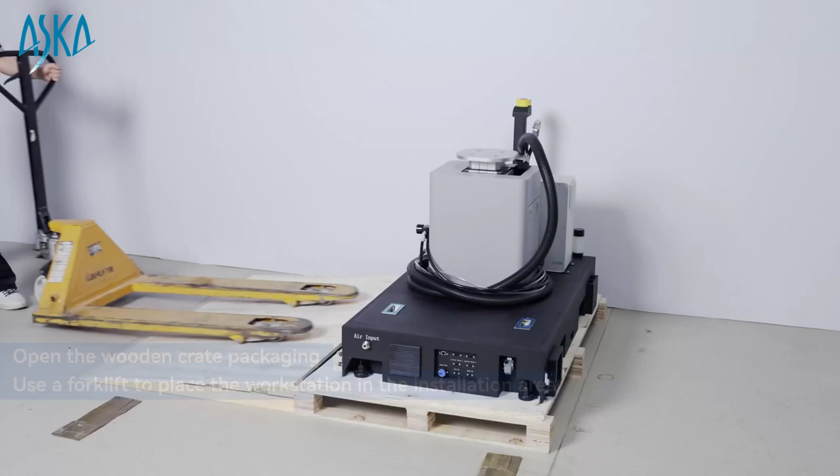Dobot palletizing solution. This video will introduce the installation tutorial for the palletizing solution. Open the wooden crate packaging. Use a forklift to position the workstation in the installation area. Note the distance between the front wheels of the forklift. Organize the items inside the package. Check all items.

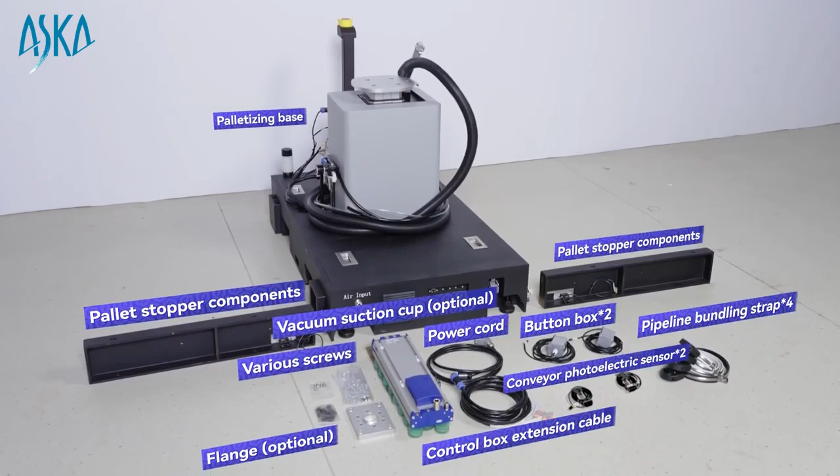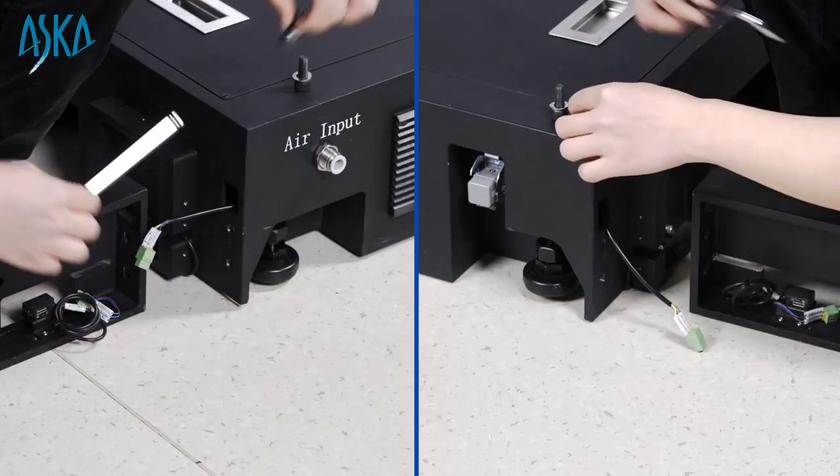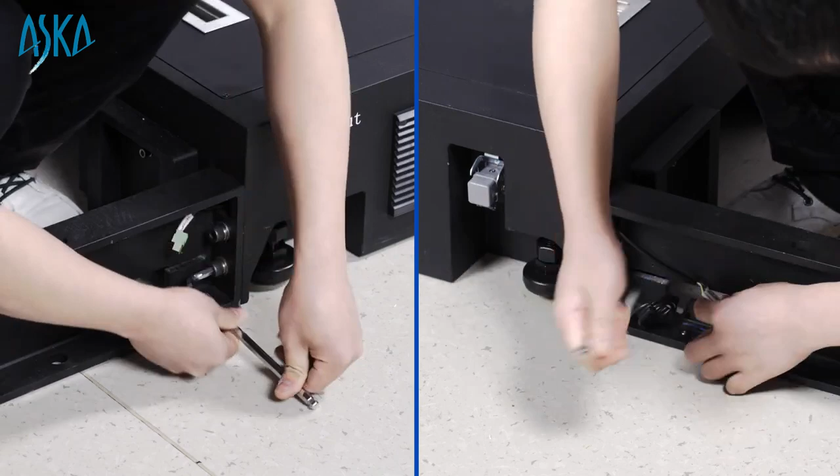Install the left and right pallet stoppers on both sides of the palletizing base. Pay attention to the orientation of the grooves during installation. Thread the sensor connector through the wire hole. Tighten the screws of the pallet stoppers. Plug in the sensor connector. Then organize the wiring harness.

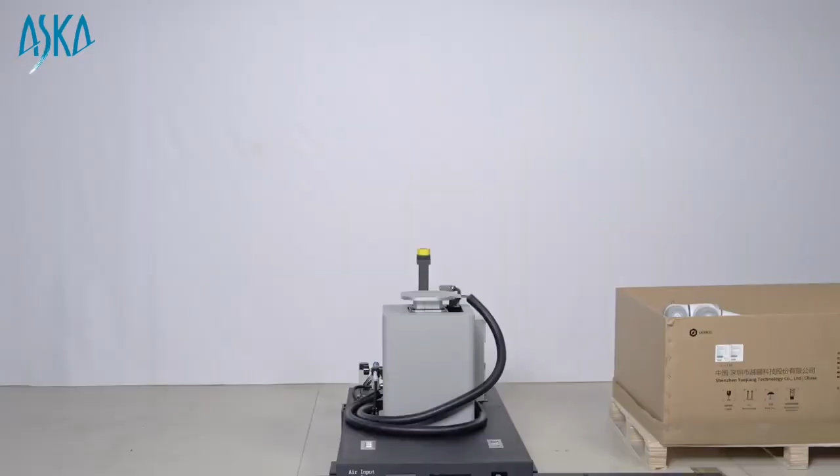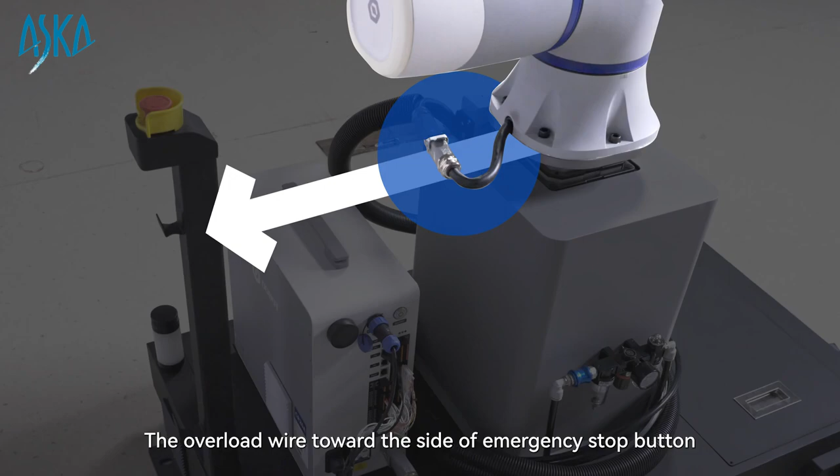Use a wrench to adjust the foot cup of the workstation at the four corners. Level the workstation. After the base installation of the workstation is completed, install the CR20A cobot onto the mounting base of the palletizer. Ensure correct installation orientation, with the overload wire toward the side of the emergency stop button. Secure the robot to the base using the 6 supplied M10x25 screws. Simply plug the robot's overload wires into each other.

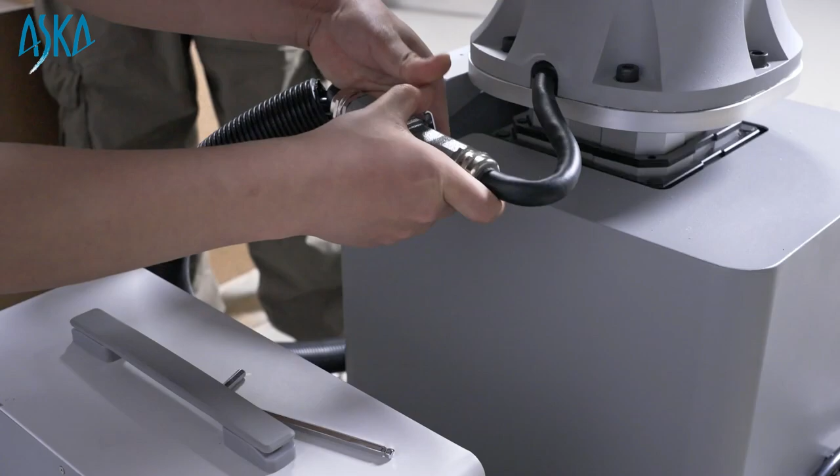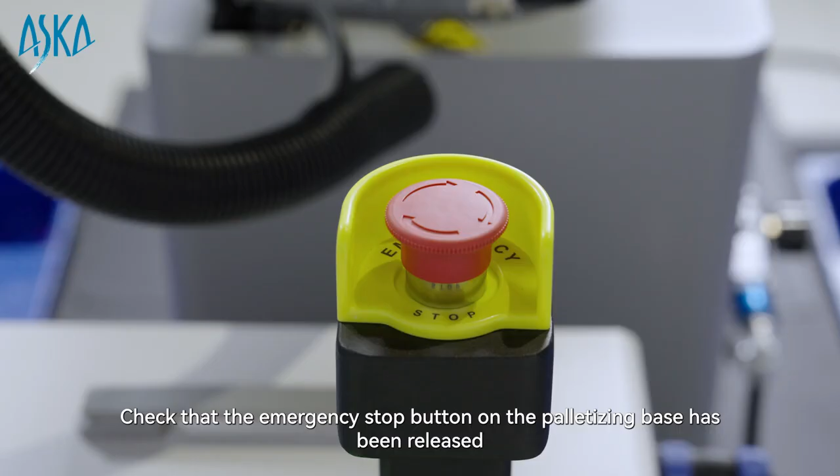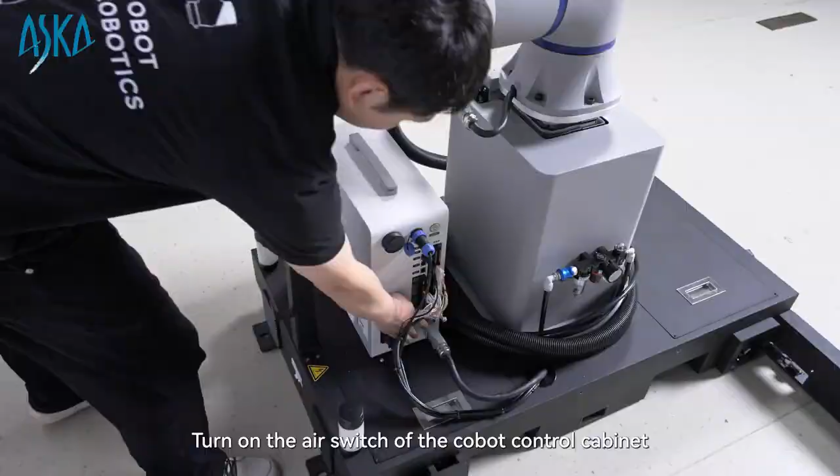Connect the pallet confirmation button box to the left and right ACK interfaces on the base respectively. Connect the conveyor photoelectric sensor. Check that the emergency stop button on the palletizing base has been released. Connect the power cord of the workstation. Turn on the workstation leakage protection. Turn on the air switch of the cobot control cabinet. Then press the power button. Wait for the indicator light to stay on steadily to complete the startup.

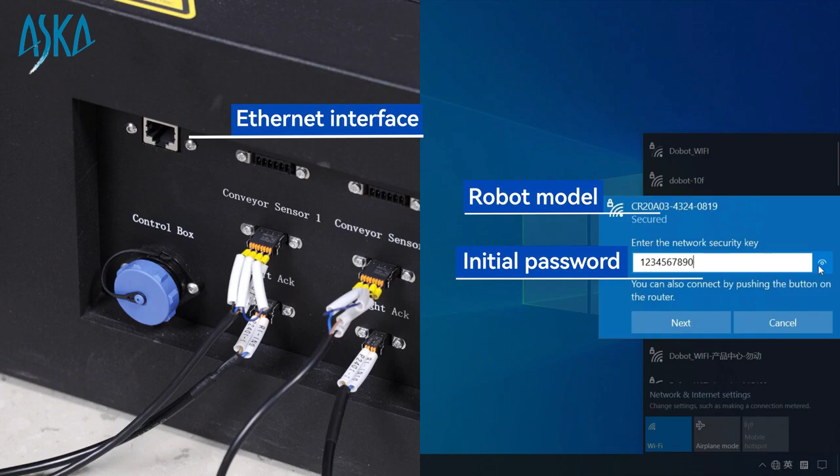Visit the Dobot official website using a tablet or computer. Download the Dobot Studio Pro software. After downloading, proceed with the installation. After the software is installed, connect the cobot to your device via Wi-Fi or Ethernet cable. Open Dobot Studio Pro, select the cobot you want to connect to. Check the software and controller versions. They should be maintained at 4.5.1.0 PAL or above.

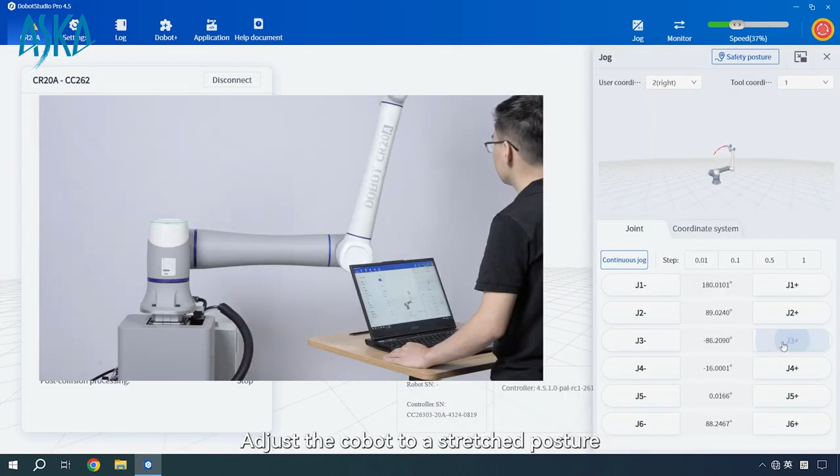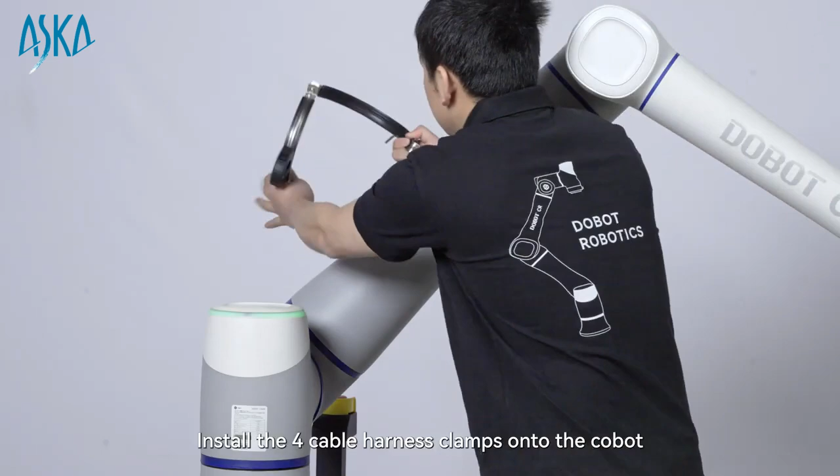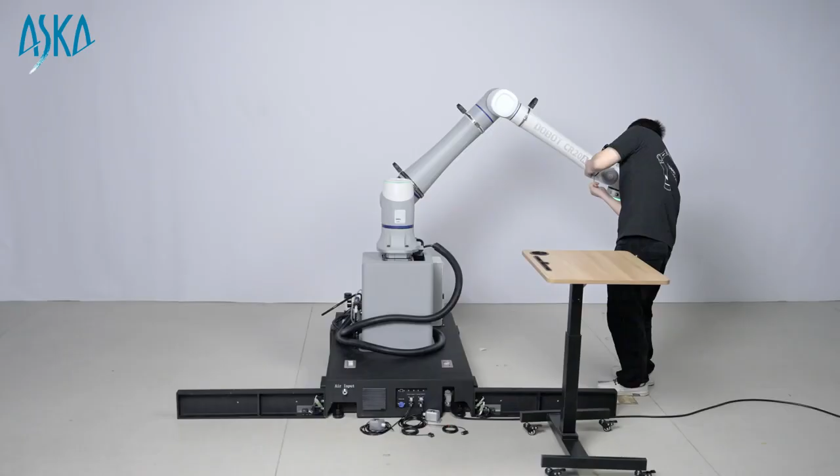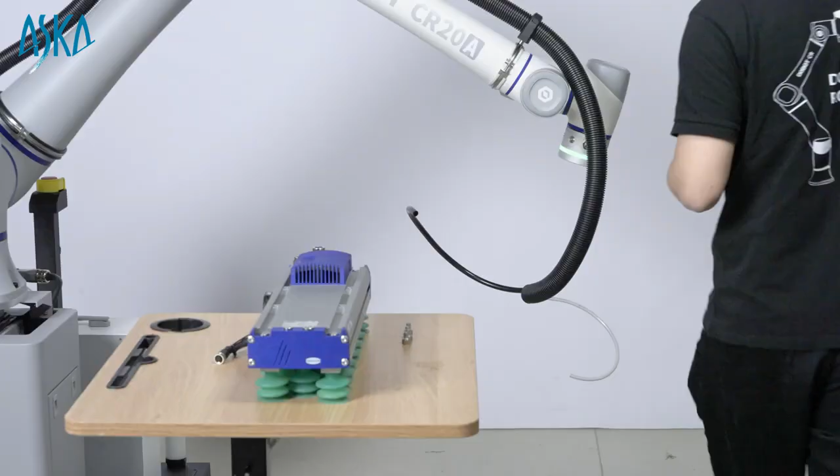Set the enable button to on. Click the jog button in the top right corner to open the menu. Adjust the cobot to a stretch posture to facilitate the subsequent installation of the cable harness and suction cup of the end effector. Install the 4 cable harness clamps onto the cobot. Organize the cables and fasten them through the bracket. Fix the flange to the end effector of the cobot with 6 M12 screws. Install the suction cup of the end effector using 4 M12 screws.

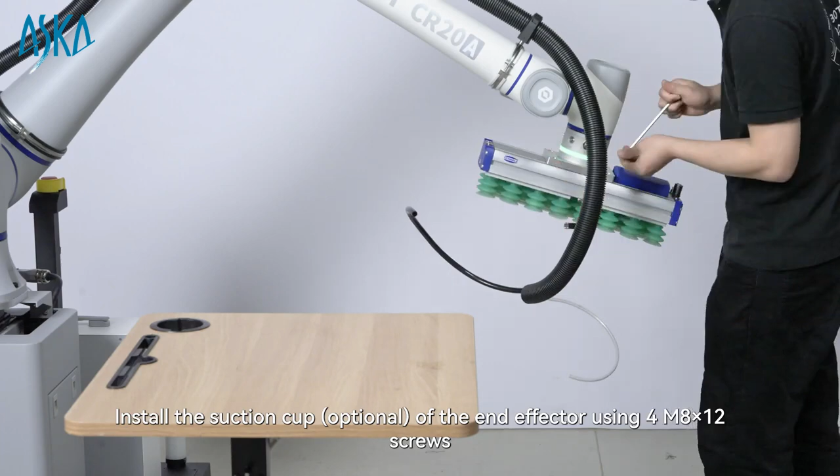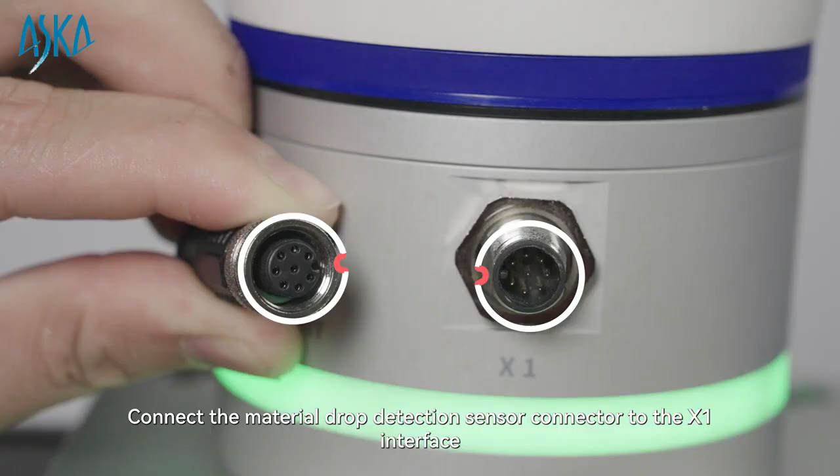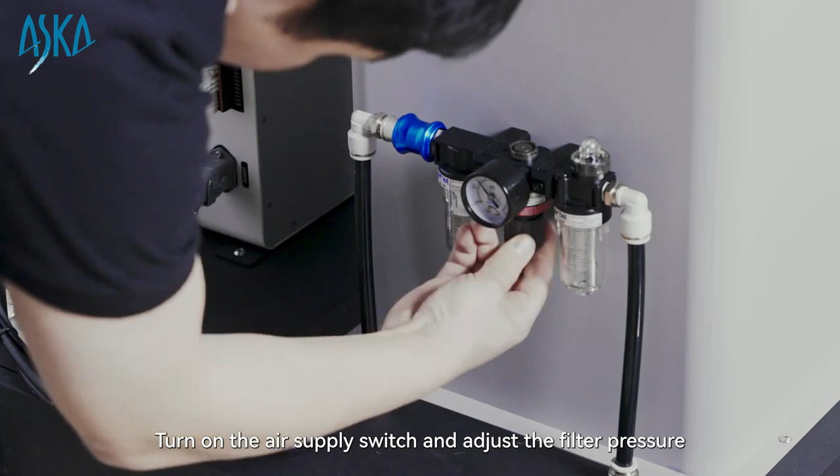Adjust the lengths of the cables according to actual usage. Insert the 12 mm air intake tube and the 8 mm vacuum breaking tube. Connect the material drop detection sensor connector to the X1 interface. Use a 12 mm tube to connect the air source to the workstation air inlet. Turn on the air supply switch and adjust the filter pressure. Recommended pressure is 0.6 to 0.7 MPa. After the palletizing hardware is installed and turned on, we can start working on the software.

Open Dobot Studio Pro. Click Dobot+. Import the palletizing plugin provided by the distributor. Click on Plugin Installation to enter the authorization pop-up window. After copying the device serial number, visit the designated website for authorization. Enter the device serial number and the activation serial number provided by the distributor on the web page. Click to obtain the registration code. Copy the registration code or save it as a file.

Then reopen Dobot Studio Pro. Paste the registration code or import the file in the plugin authorization window. Click Authorize. Wait for a moment. Authorization and plugin installation will be done automatically. After completing the authorization, you can start using the palletizing function to generate the running program.

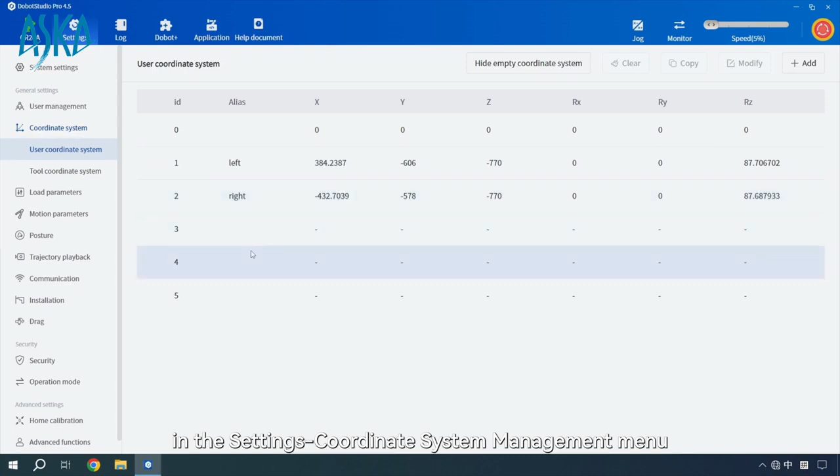Check whether the coordinate system used by the pallet has been built in the Settings Coordinate System Management menu. Click on Tool Coordinate System. Fill in the tool coordinate system values according to the actual coordinates of the tool. Click Save to complete the tool coordinate system setup. Click Monitor in the upper right corner of the interface. Check whether the default IO matches the actual setup.

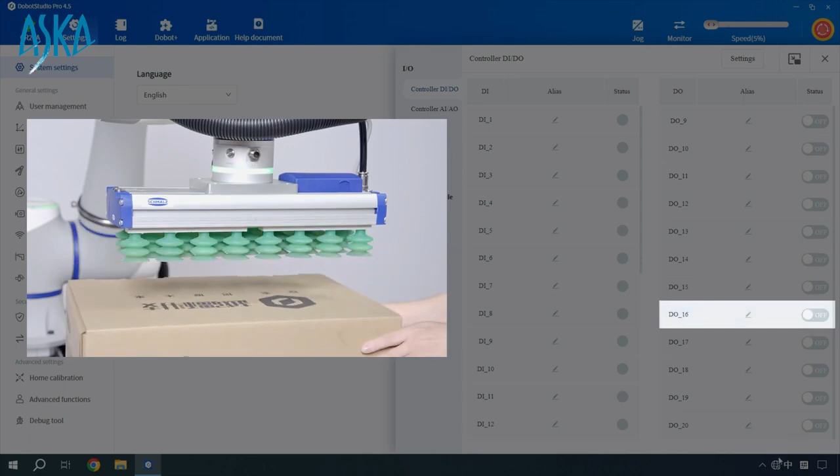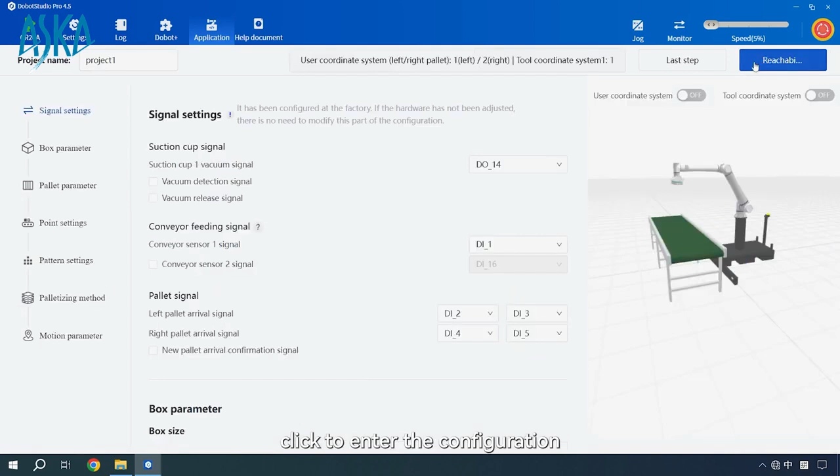Next, create a new palletizing project. Go to the Application menu, click Palletizing. Click New Project in the upper right corner to create it directly, or click to create a new project in More Projects. After configuring the basic parameters of the project according to the actual application scenario, click to enter the configuration. Configure the suction cup I/O signal. Configure the signal for the conveyor belt to feed material. Configure the signal for confirming the new pallet's position.

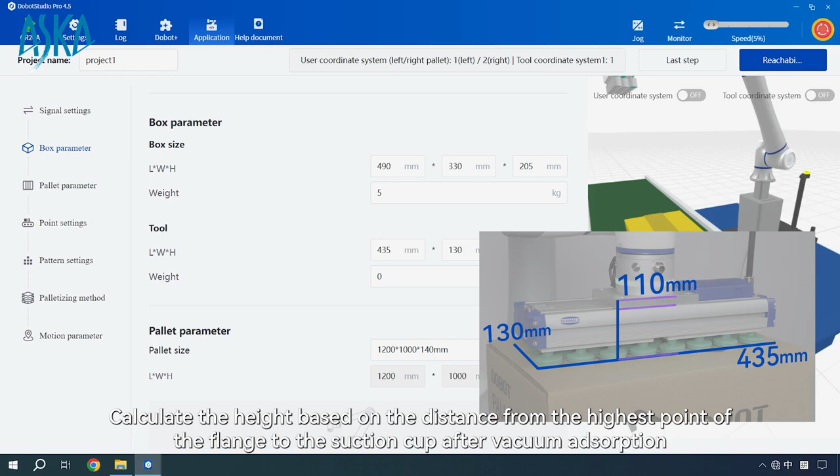Next, set the length, width, height, and weight parameters of the containers. Set the length, width, height, and weight parameters of the end effector. Calculate the height based on the distance from the highest point of the flange to the suction cup after vacuum adsorption. Calculate the total weight of the flange and the suction cup. Select the pallet size.

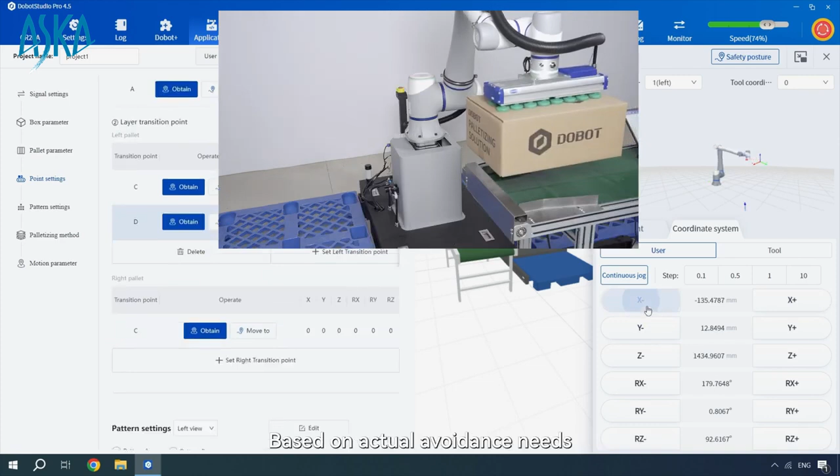Set the pickup points according to the actual collision avoidance needs. Configure transition points for the left pallet layers. Based on actual avoidance needs, configure transition points for the right pallet layers. Set the stacking pattern, set style A. Add containers. Adjust the container's unloading position.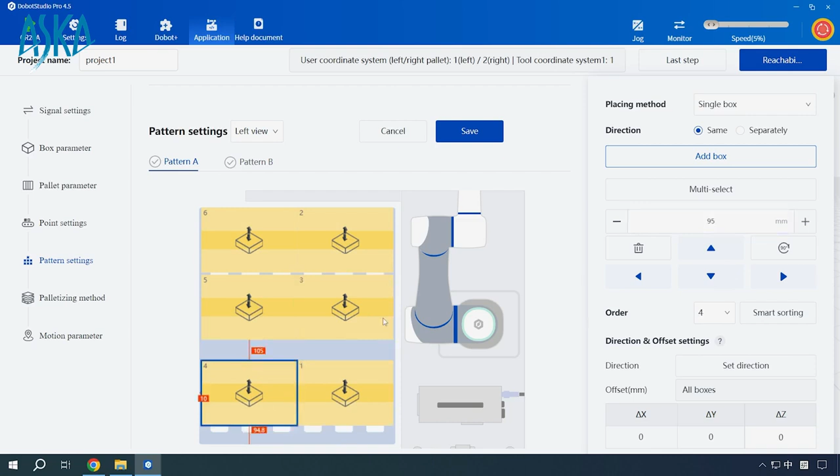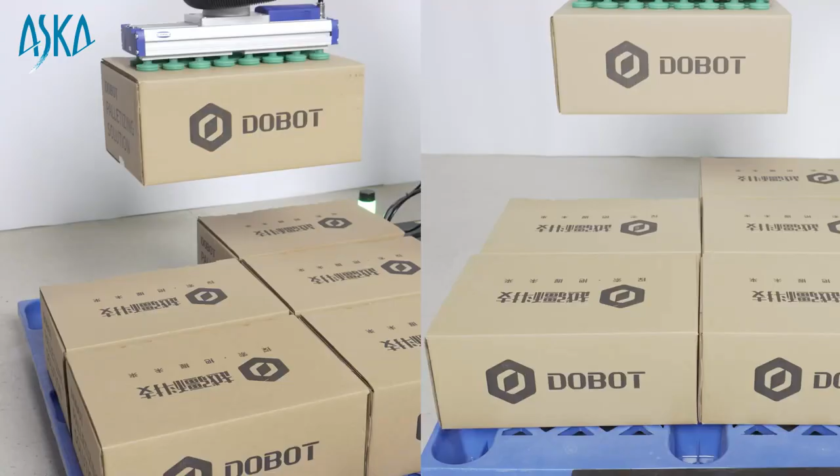Set the placing order. Reasonably set the placing direction as needed. Adjust the placing offset as needed. If the stacking patterns of adjacent layers are different, set pattern B according to the stacking requirements. Set the number of layers after completing the stacking pattern settings. Set the stacking method for each layer.

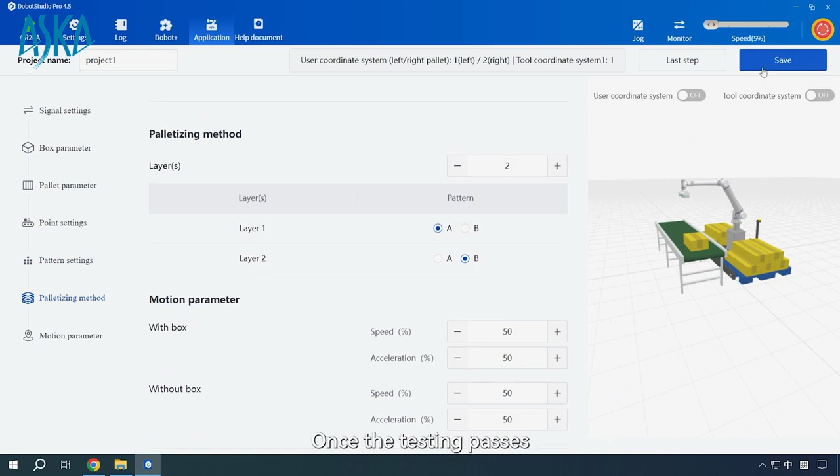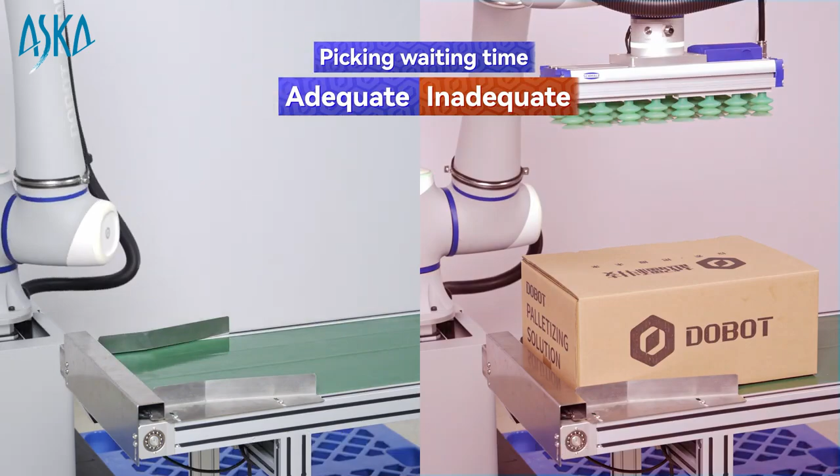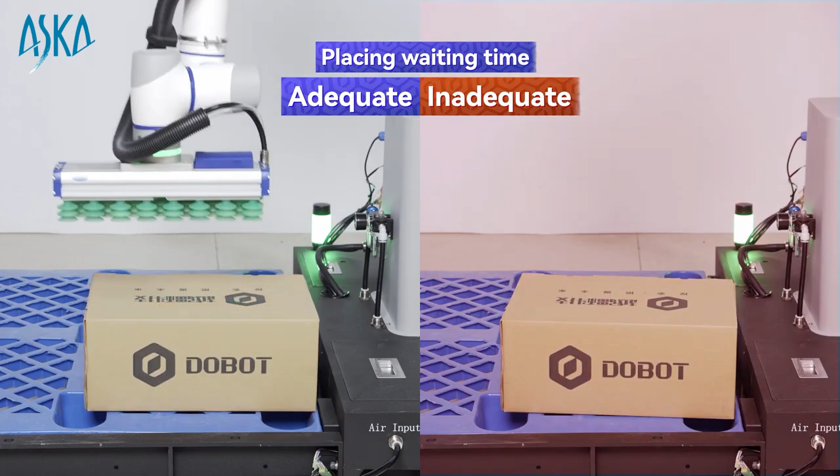Motion parameters can be set according to actual needs. Default settings are recommended. Perform reachability testing after setting. Once the testing passes, click Save. Finally, adjust parameters. If the set suction waiting time is insufficient, it may lead to material dropping issues. If the set placing wait time is insufficient, it may lead to inaccurate placing positions. If the safe height for picking up materials is not sufficient, there may be instances of squeezing the material box.

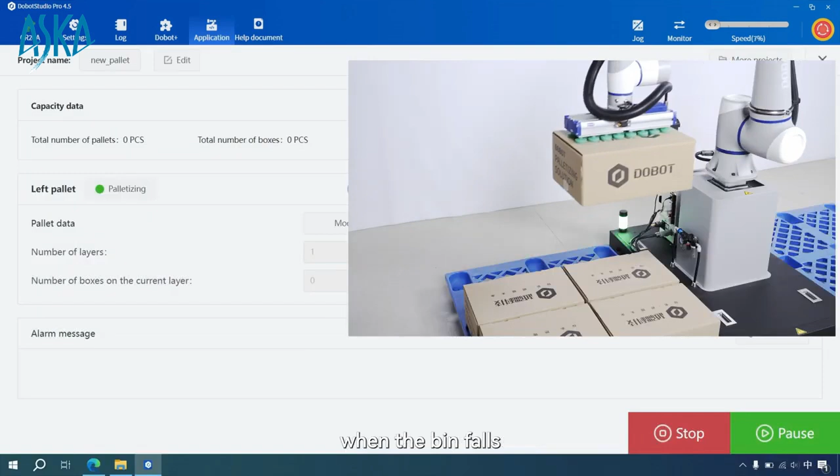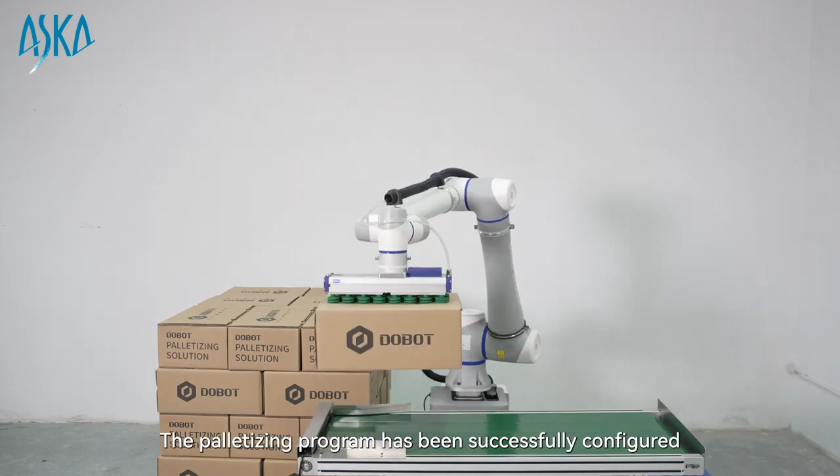Enable vacuum detection. When the bin falls, the robot will stop running and issue a warning. After setting the palletizing height compensation, when palletizing multiple layers of material boxes, if there is a significant cumulative deviation in stacking height, adjust it using the Z-axis height compensation function. At this point, the palletizing program has been successfully configured. You can return to the homepage to start running the program and view the palletizing program execution data.